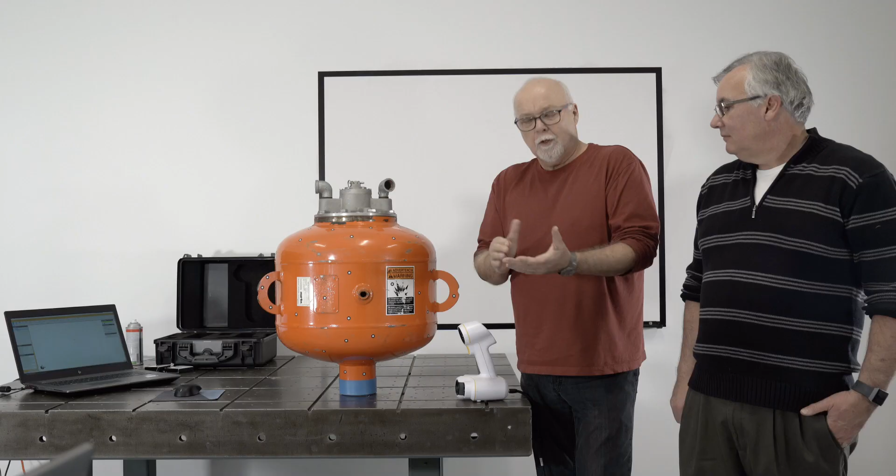Okay, welcome back to another video. Here in this video we have a tank which is going to be used in cold weather climates, and we're going to scan this tank for the purpose of creating insulation covers. We're going to put 3 layers of insulation covers on this tank. One is an outer layer for protection, the second layer is for insulation, and the next layer is for contact with the tank itself. On the screen we have Mark Jewell from ExactFlat.

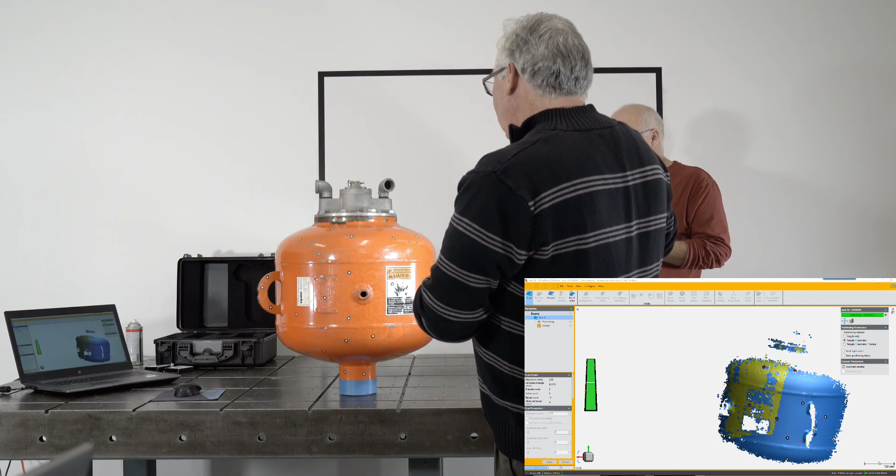Mark is actually working the scanner right now, and we also have Peter Warburton from Peel 3D, who is the head of the Creaform's Peel 3D division.

You can see that we have a tank here, and Mark is scanning the tank right now. We'll just wait for him to move out of the way, but you can see that there's little targets on the tank. These are these dots. You can see them being picked up in the scan.

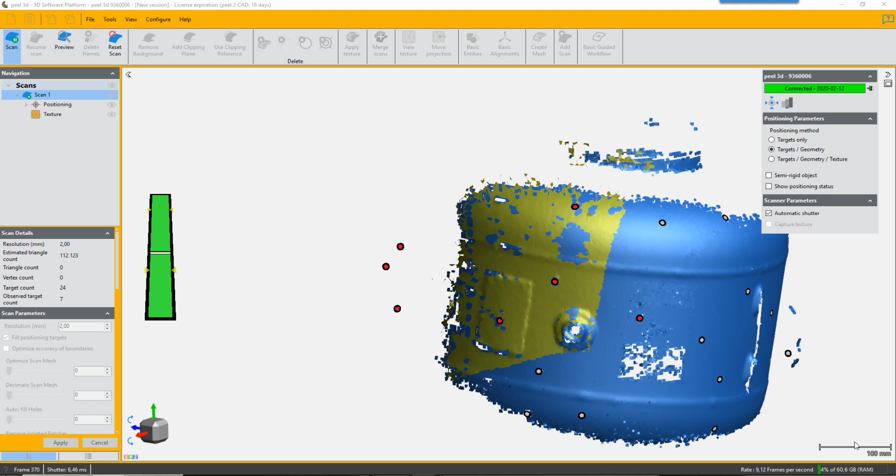The dots are for picking up the scan because this is a very shiny surface and they help with shiny surfaces. There's 3 ways you can use the scanner. One is to use the scanner to pick up geometry. The second way is to pick up textures. And the third way is to pick up these targets or these dots here. You can use either way depending on the particular part that you're scanning.

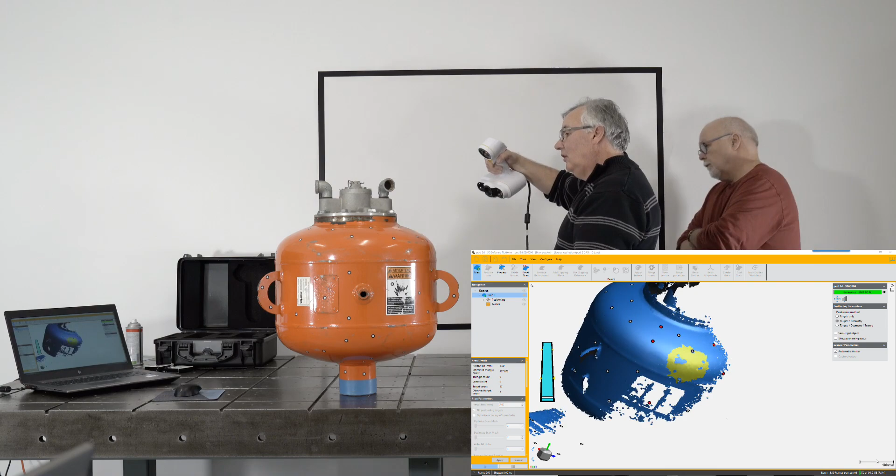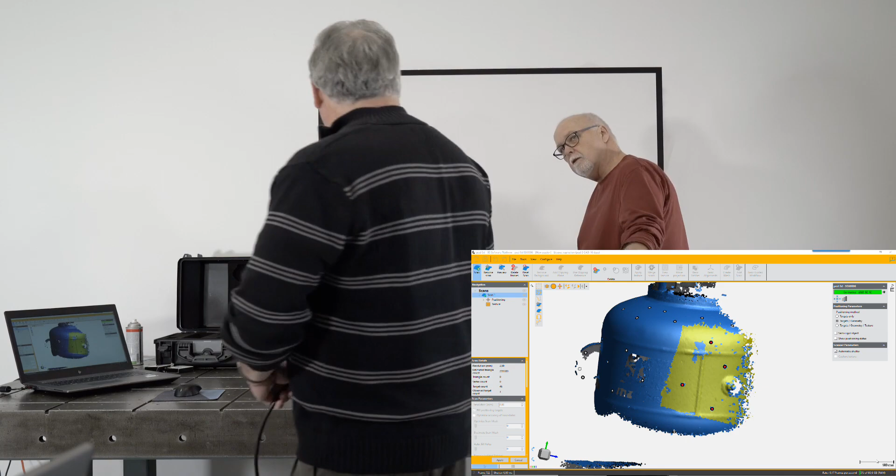If you wanted graphics, you could scan and pick up the graphics. You would use the texture mode, and here we're using the target mode. It's a shiny reflective surface, so the targets aid in differentiating different sections of the geometry. And you can see this is a very symmetrical part too, so the targets will help in making the scan very quick and efficient.

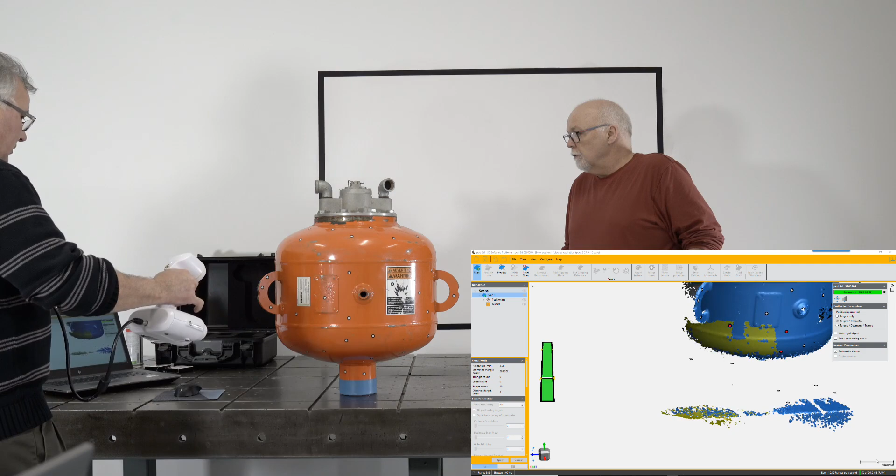You can see Mark is scanning, and there's a little bar on the left-hand side in the scanner window. That bar represents distance. When you get your scanner, or if you're new to scanning, what you have to do is keep your scanner approximately 30 to 40 centimeters away from your part. And that bar gives you a distance indicator.

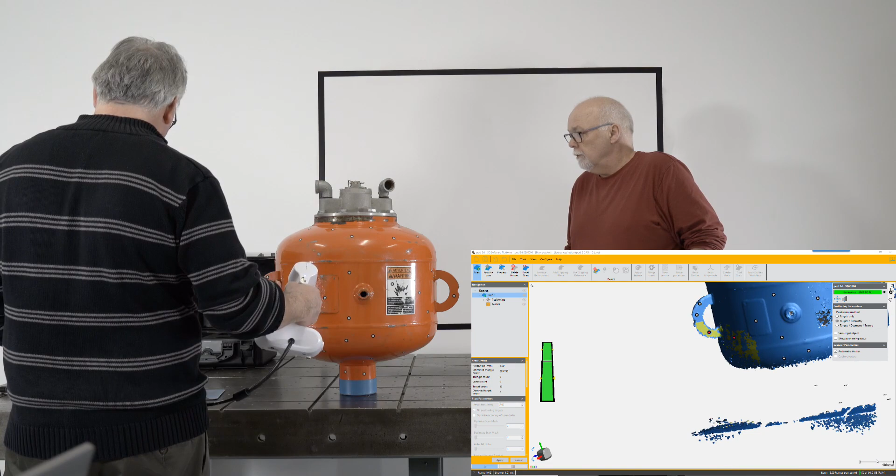If the little white line drifts towards the top, you are getting too close. And if the little white line drifts towards the bottom, you are getting too far away.

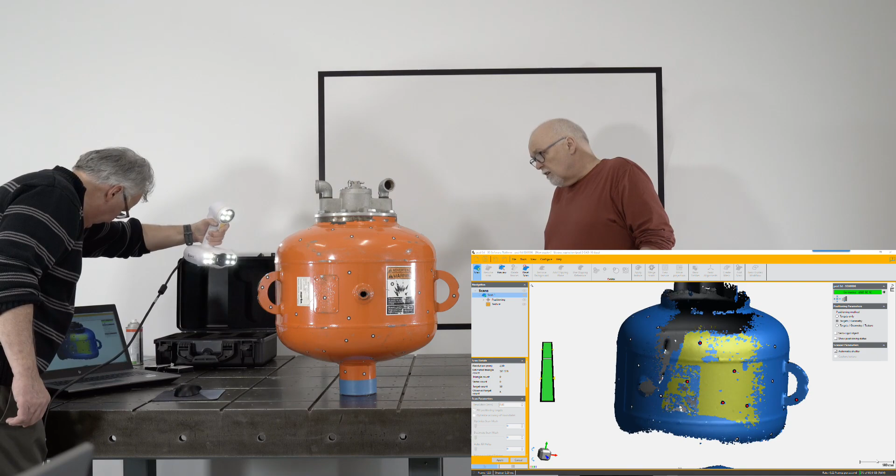Good scanning technique involves holding the scanner in such a way that you are orbiting the part. So you want to kind of sweep your hand across the part and hold it so that you're perpendicular to the part you're scanning. You don't want to scan at an angle. It can certainly pick up targets at an angle, but it is better if you hold it perpendicular to the part.

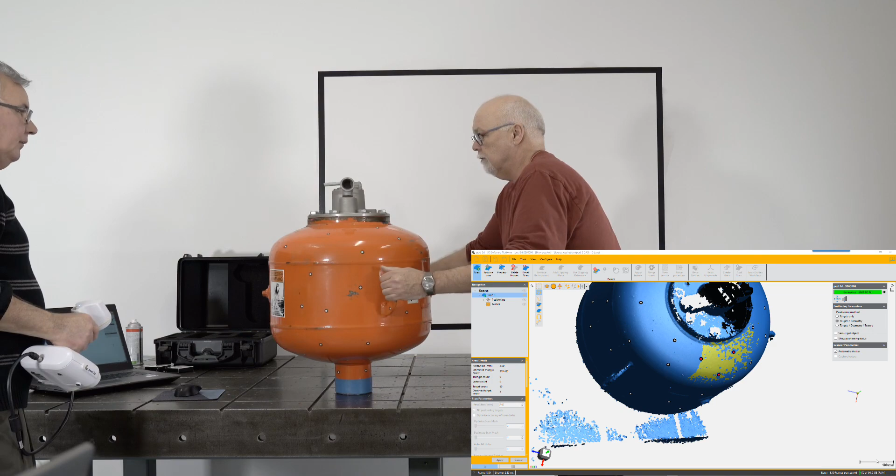You can see Mark is scanning overhead right now, and he's holding it perpendicular. Now Mark is pretty new to the scanning process, he's not an expert in this particular part of the workflow. Peter certainly is. You can also see here that we can easily change the orientation of the part.

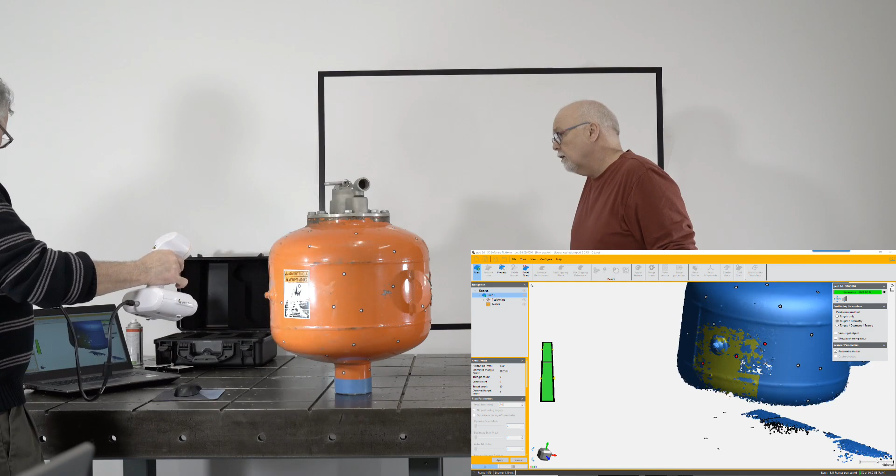The reason we can do that is because the targets are on there, and all that you have to keep in mind is when you start the scanning process again, you start from a known location, and the known location will allow the scanner to pick up its reference geometry and then continue scanning without interruption.

You could move this around, you could tilt it over, and you can see we're going to do that right now. We're going to tilt it over to get to some of the more difficult to reach parts, like the bottom or the top, and you can see there's targets down there as well.

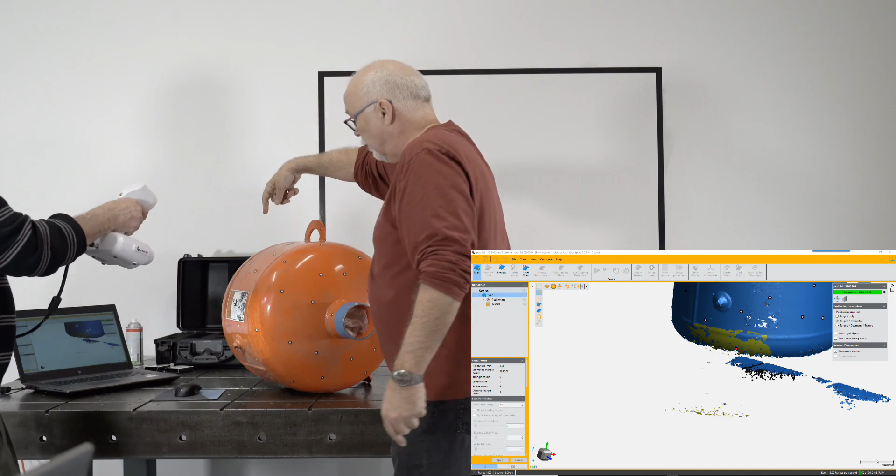What Peter is just instructing Mark to do is to scan again at a 90-degree angle and kind of orbit and sweep across the part that you're scanning. And you can see down in the bottom right there the progress for the scanner picking up the part.

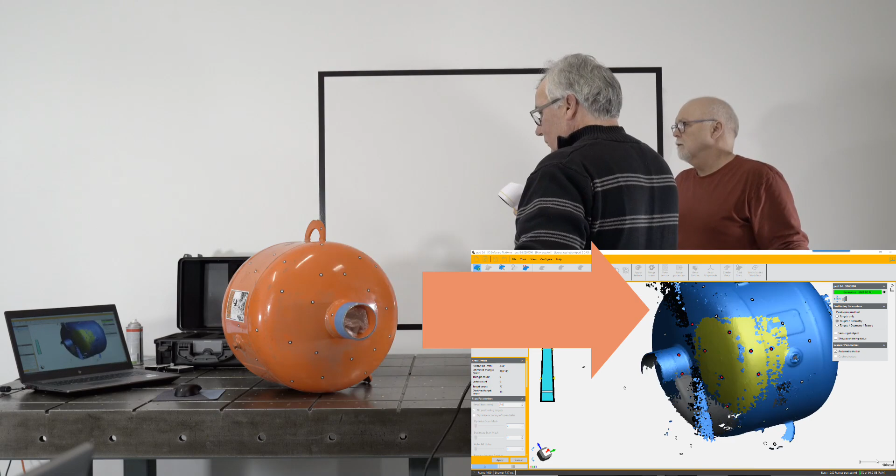You can also see there that there's some unwanted geometry. That's the table, so we have some of the table being captured here. We're going to show you how to remove that. That is not a problem. The software that comes with the Peel 2 CAD scanner can easily accommodate getting rid of that very easily. So you need not be too precise.

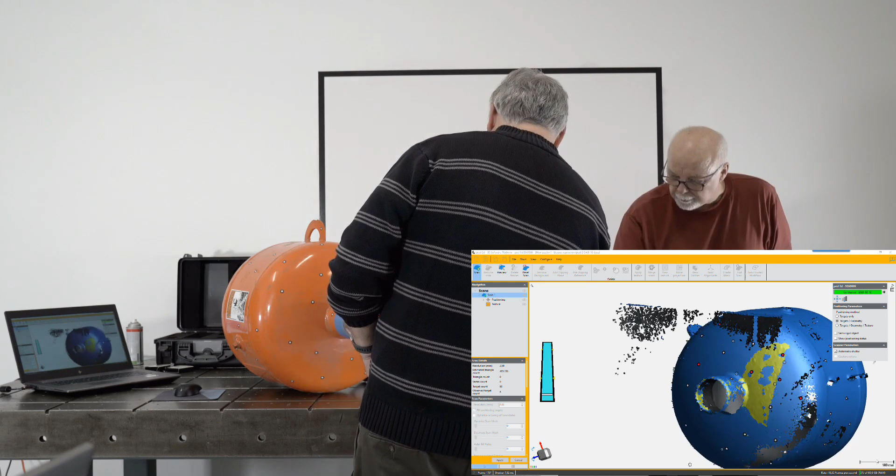Although you want to set up your workflow to avoid those things as much as possible. The other thing to keep in mind when scanning is, conceptually, it's like a can of spray paint. If you hold the spray paint on one location, you're going to overpaint a surface and potentially the paint will run.

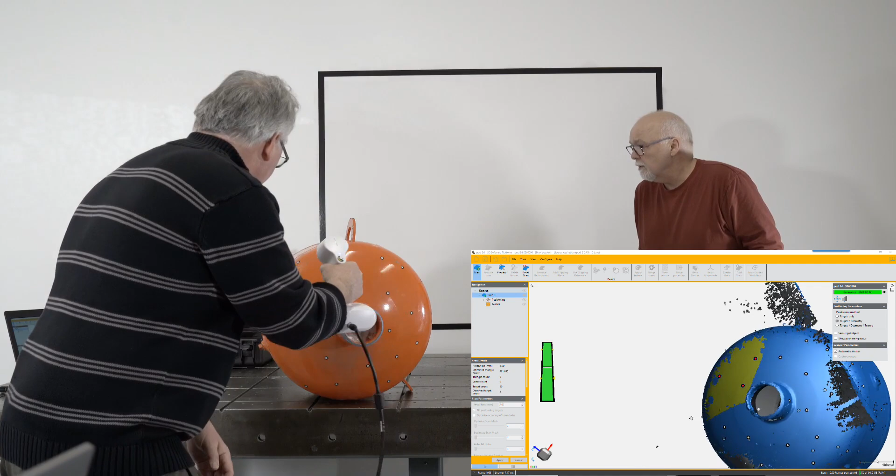Of course, there's no paint involved when you're scanning, it's just light. But what will happen is if you hold the scanner in a location longer than necessary, you add density to your mesh, the polygonal mesh that the scanner generates. You'll have increased density of triangles that don't add any value—they just take processing overhead. So it's best not to do that.

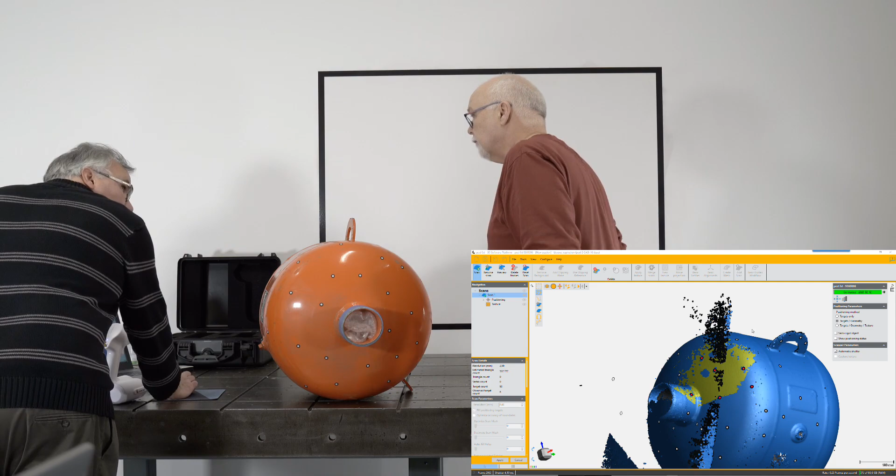It is best to scan in such a way that you are picking up the geometry you need, not overscanning and not underscanning. Now if you do happen to overscan or underscan, it's not a problem—there are tools that can be used to fix those artifacts. However, if you're doing a lot of these, you'll want to set your workflow up so you don't have that problem.

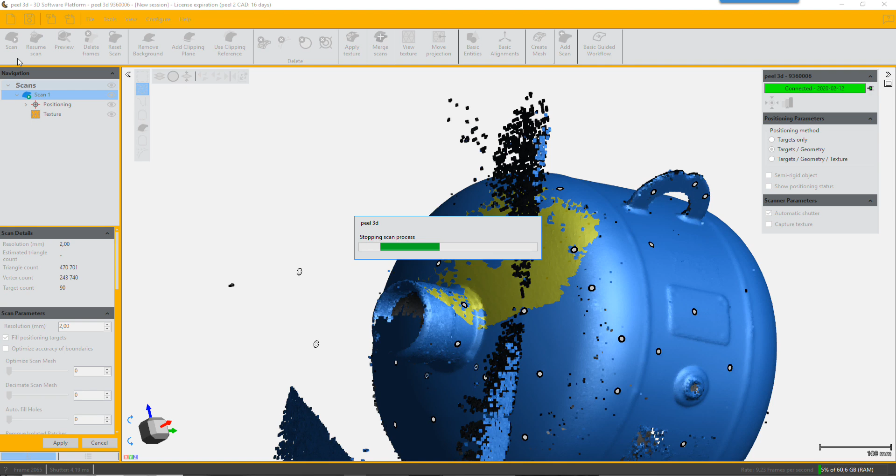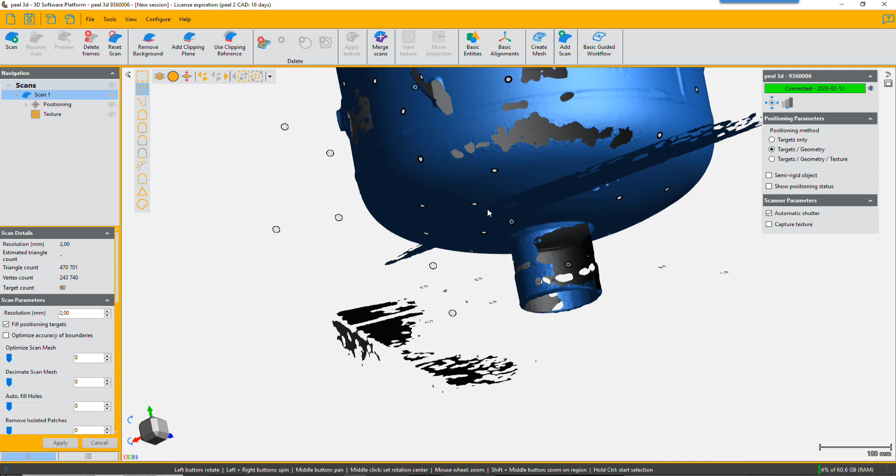Now here we're processing the scan. This is the first part of the scan, and we're going to have a look as we go into the software and see what we picked up. You can see there are portions that look pretty good and portions where there are some holes. We can stop the scanning process midway through, evaluate the work that's being done, and go back to fix or rescan areas where we need extra detail. It looks like in this instance we're going to have to do that, so I'm going to reorient the part to get to the sections we want to rescan.

As Peter and Mark put that into place, you'll see once we start the scanning process again, we just go over to the top left and click start. There we go, and now we're going to start the scanner, and there we go.

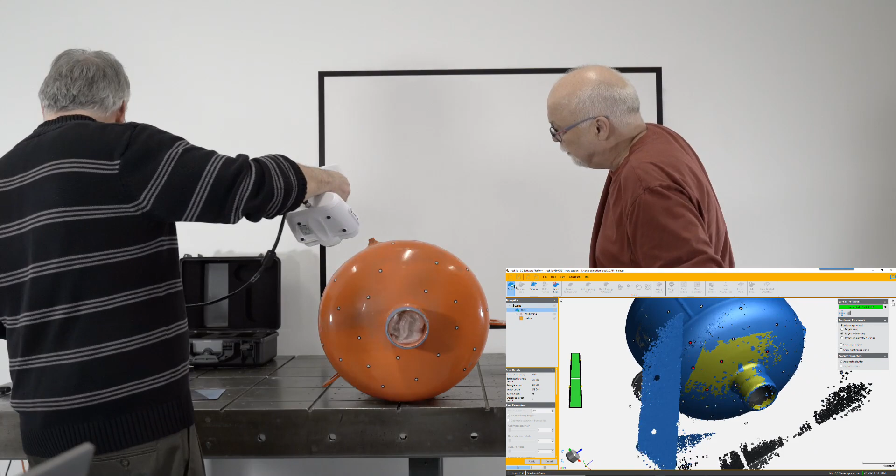We can start to get some of that geometry that was missed. Now the scanner does have tools to fill in holes—we're going to show you that in the next section on converting to CAD. But in this instance, you can easily restart your scan and capture the geometry you didn't get. You can position your part in any orientation, and again, if you're doing a lot of these, you'll want to set up your workstation and workflow so it's easy.

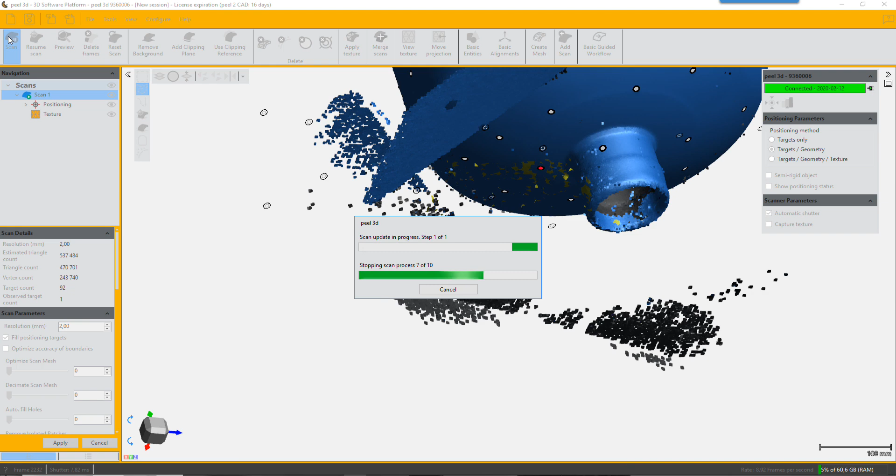So here we're just going to pause the scan and process it. I'll also show you how to get rid of excess detail we picked up where the scanner captured some geometry from the table. Let's go into it and have a quick look to evaluate our scan. We'll move around here, and it actually looks pretty good. There are some holes, but we are going to leave those deliberately.

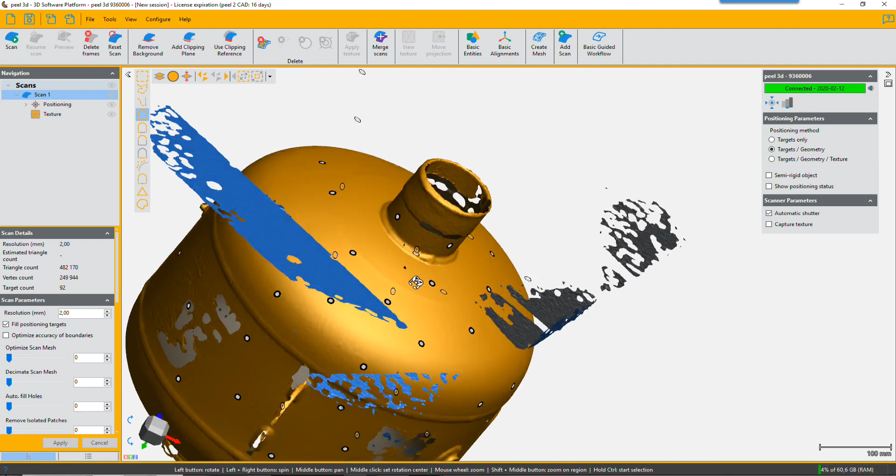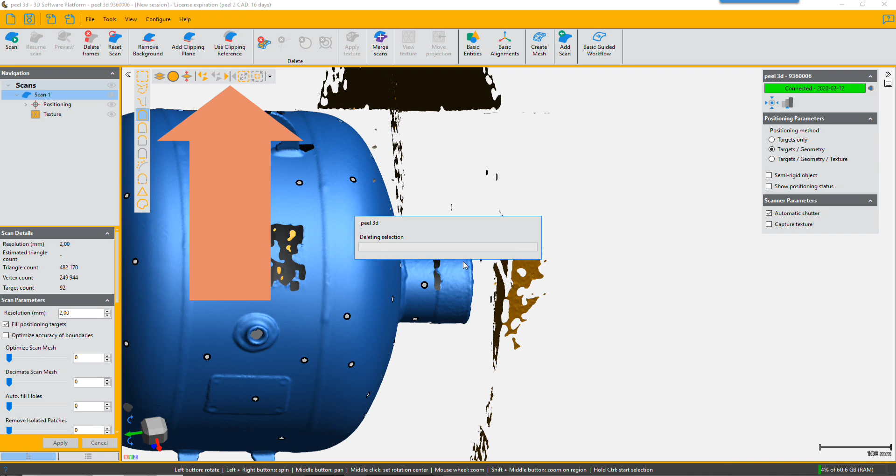Now we select this tool here, click on it, and click anywhere on the surface we want to keep. You see it was just highlighted in orange, and the parts not highlighted are out of it. So we're going to invert the selection—that means we take everything except the parts we want—and then hit the delete key. You select the section you want, hit invert to select the undesirable sections, then hit delete. That's how quick and easy it is to delete sections of your scanning process that you didn't want to capture.

Now, as I said, there are some holes here. We're going to show you in the next process how to fix the holes, but that's the end of part 1. This concludes part 1 on how to scan your part.